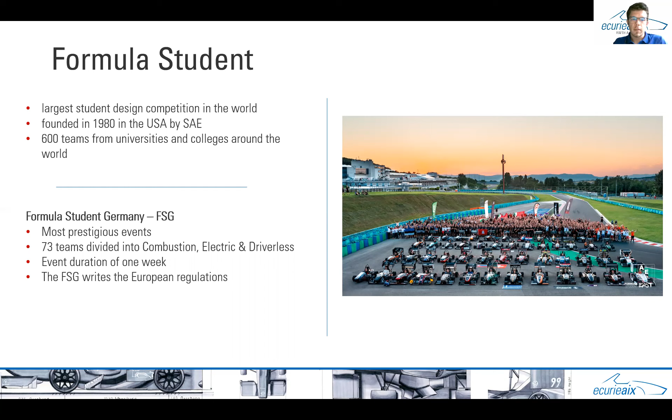To get a short overview of what I'm talking about, in the beginning I want to introduce you to our team. Then I give you an overview about our last season and the success we got. And then I want to talk about the Altair software we use. And in the end, I will give you an overview about the highlights in our current cars which are related to the use of the Altair software, especially the chassis or topology optimization and the structural aerodynamics simulation.

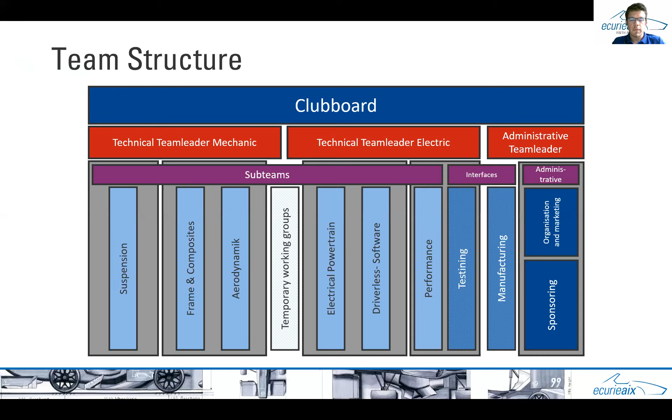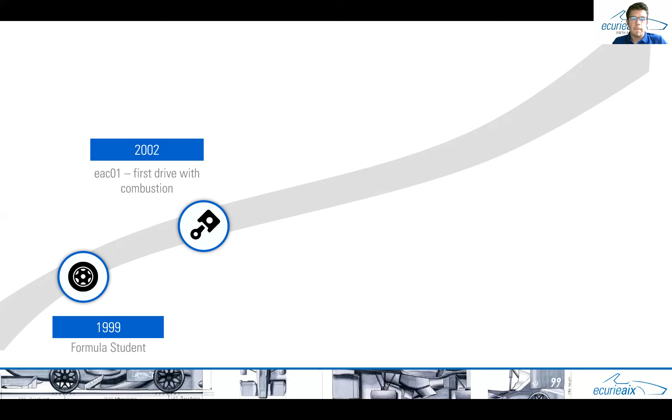As I said, we were founded in 1999, and in 2002 we had our first drive with our first combustion car, the EAC01. Then in 2010 we built our first electrically powered car and ran the two classes in parallel until 2013, when we built our last combustion car. And in 2017, we added the driverless software and sensors, cameras, all you need for a driverless car onto our 7th electric car to start competing in the driverless class.

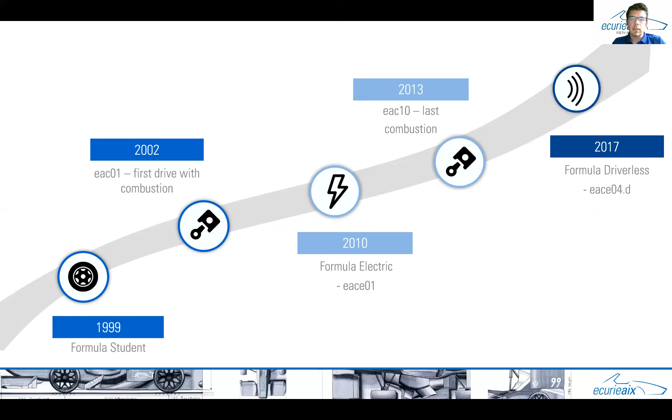Here are the results from the summer from the EV car. It was a really successful one for our team because we won a competition overall for the first time in club history, the Formula Student Austria. And we were always close to the podium at almost all the others as well. We had great success also with the driverless car. We were able to achieve 3rd place overall in Hungary, at Formula Student East.

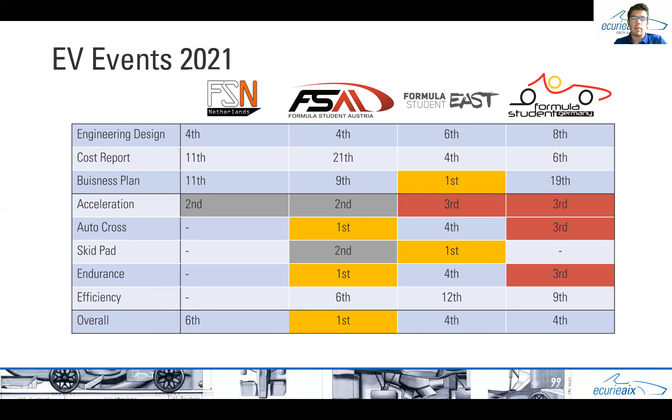So we do not achieve the low weight only because of the choice of material, but also with new geometries, lighter geometries, optimized geometries. But there I have an example later. The software we use is, on the one hand, EsaComp, which I will explain later.

Mostly we use HyperMesh with the solver OptiStruct, with which we do all structural simulation. But also Altair Inspire is very exciting for us because we can rebuild our topology optimization with it very well. In the following slides, I would like to give you an overview and more detailed impressions of what we do with the software, what we have achieved with it and how our workflow looks.

Here, let's start with EsaComp. When we start to design a monocoque, we do the preliminary design with EsaComp. We simulate there a 3-point bending test because it's prescribed by the regulations we got from the FSG. For some years now, we've been using a sandwich structure in the monocoque, which means that there is a carbon outer layer, a core material, and an inner carbon layer. And that gives a lot of structure and, at the same time, a lightweight design.

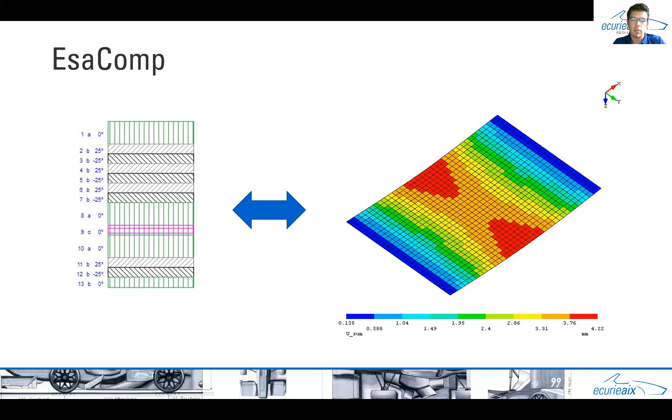And so in EsaComp, we can iteratively change the layers or the core materials, for example, aluminum honeycomb, or the angle of the layers we want to lay in the panel. So we can click them together fast and simulate them also very fast. And then in the end, we can incorporate these results into the monocoque simulation, which you can see on this slide. Here you can see our current monocoque in HyperMesh.

After constructing it finally, we removed all detailed parts which are too complex, which simplified the meshing very well. Then we declared some different zones in HyperMesh so that we can improve them locally more easily, because then we can assign a whole ply to the whole zone more quickly. In addition, we simulate the whole monocoque with a ply-based simulation instead of a zone-based simulation. That gives our constructor more freedom in HyperMesh to play around with some plies.

Also, the main hoop and the front hoop are integrated into the simulation. They are simulated with 1D beam elements, with the corresponding material values from the steel we use for those two parts. We integrate them because they are main parts of the monocoque, and they stabilize it quite a lot.

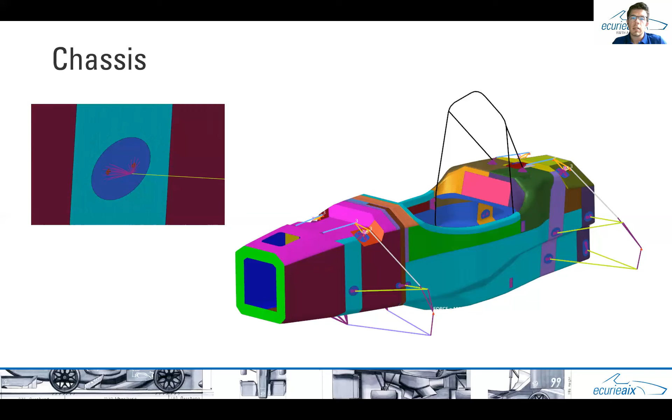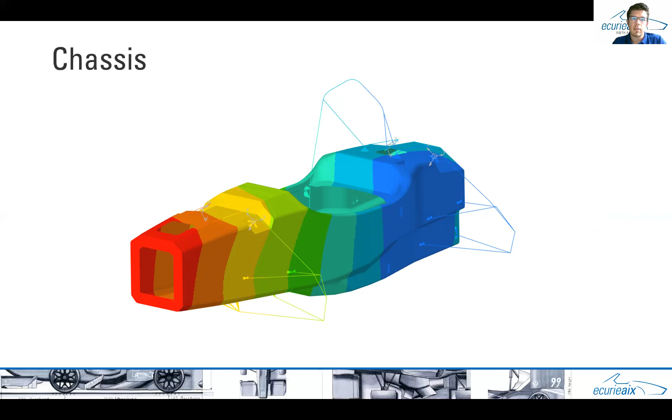Another example of a part in the car which we designed with HyperMesh is the steering cage. It's right behind the dashboard and houses our steering. Here we were able to save a lot of weight due to the fact that we used topology optimization. Afterwards we printed the result out of aluminum.

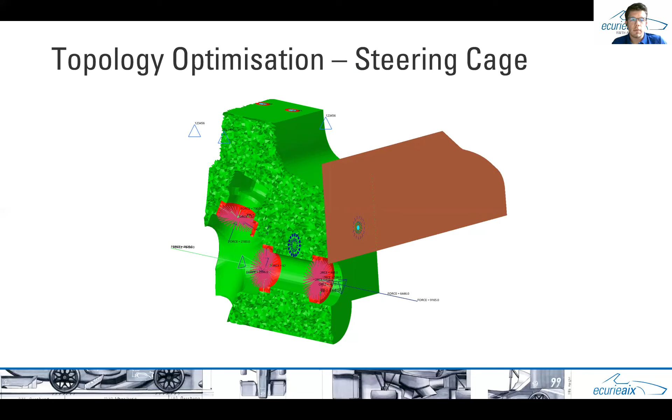Here on the slide, you can see the installation space we gave the program and the corresponding bearings with their forces, the forces which the simulation should take into account. We determined these forces beforehand so that we got realistic simulations for our steering cage. And after some simulations, we got this result.

It's always exciting to see those results from topology optimization, because you can learn a lot about the load paths from these different forces, and also for different materials when you tried it out. It looks a little bit different every time.

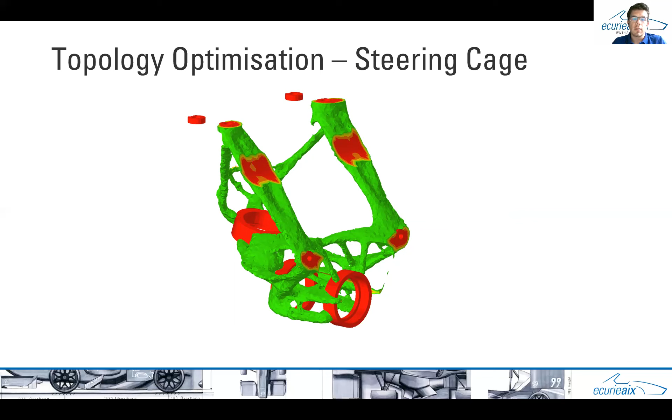So this was our result for the steering cage, and here you can see where we began to reconstruct our result from the simulation. We did this in Altair Inspire and tried to do it as closely as possible to the simulation result. It took a lot of time, but the result was quite nice.

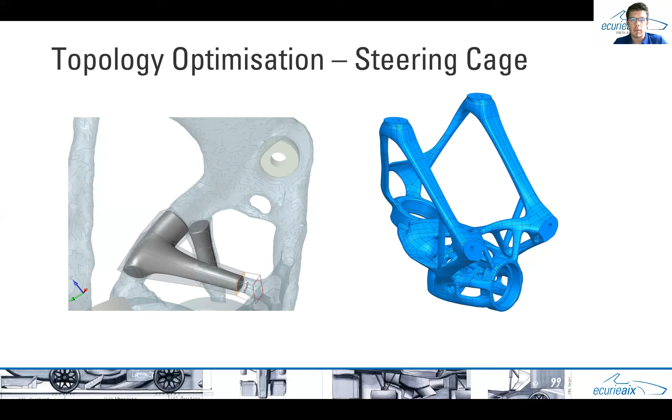After we constructed it, we went back to HyperMesh and simulated the constructed part with the assumed forces and the same connections as the topology optimization, so that we get an idea of how the construction works, and maybe we can save some material somewhere to save some more weight.

So it was an iterative loop of simulating, interpreting the results, removing some material and simulating again until we had a final result where we could save 30% of weight compared to our old concept, which was a welded aluminum cage behind the dashboard. So quite a lot when we think about this small part.

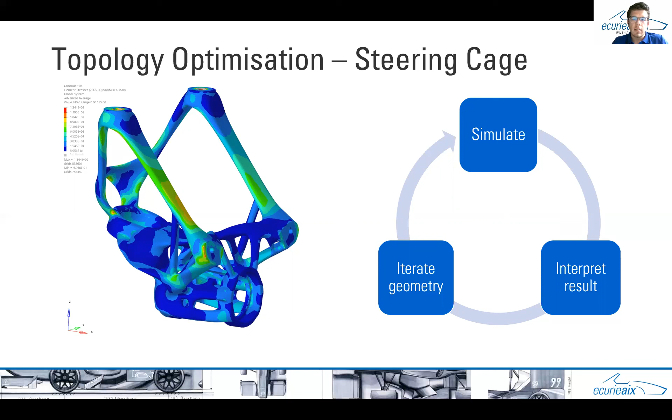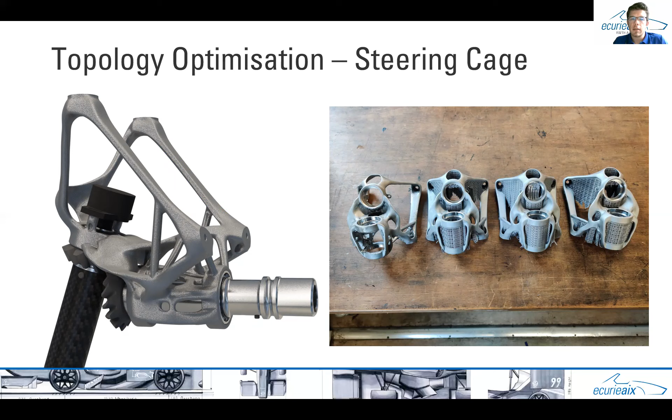Then I have another assembly group which was designed with HyperMesh, the aerodynamics. We simulate all structural things for the aerodynamics in HyperMesh. After we retrieve the geometries from the aerodynamics group, we can simulate the layup and the inner structure for those parts. We calculate on the one hand with the aerodynamic load, and on the other hand with the loads from the regulations. For example, every aerodynamic part is allowed only to displace 10 millimeters while 200 Newton act on a surface of 225 square centimeters.

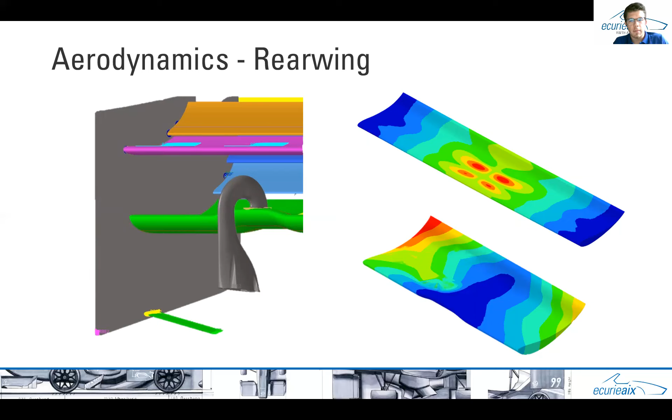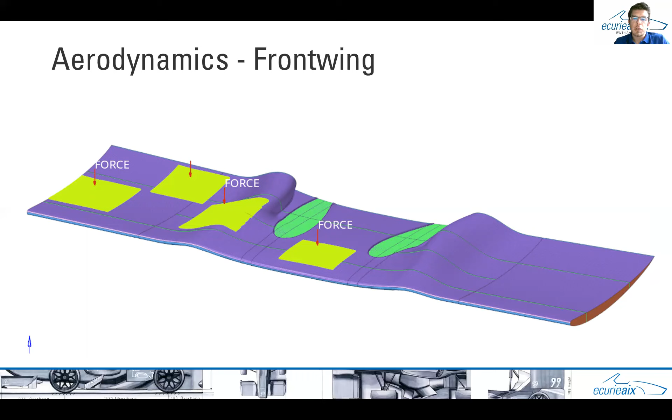In the next slide you can see the result from the simulation. It's the result from the force acting most outward, so it had the most displacement, obviously, because of the largest lever arm. After every simulation, we can see if it makes sense to add some more layers of carbon, maybe some UD stripes to support the structure, or some different inner structures. In this way, we did many simulations for every part to get the best layup for our structures.

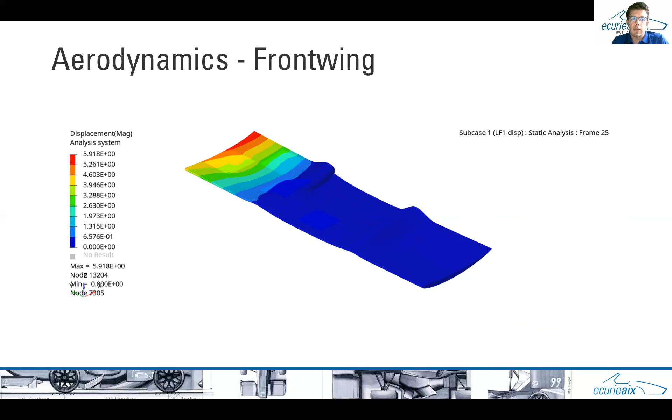But for us, not only the displacement is interesting, but also the composite failure of the layup, because when they have too much stress, they fail, and that would not be good, of course. That's also something we have to take into account, that all our fibers are still working under the loads we have in our races.

Here's also the example of the front wing main element on the top and on the bottom side. There are different places where the composite failure is bigger, and where you could think about adding some more plies to have a bigger safety factor.

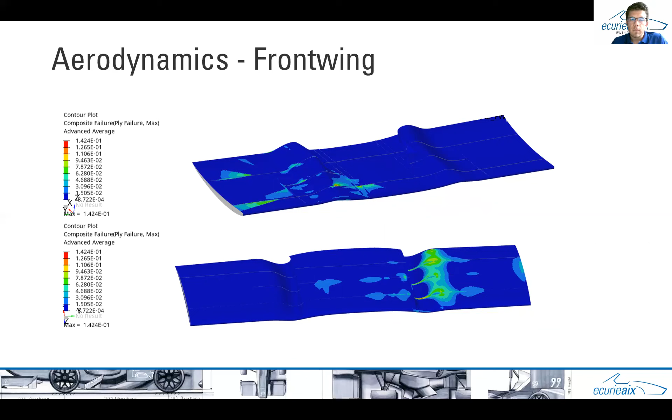So this was my presentation about the work with the Altair software in our Formula Student team. I hope you got a good insight into our work and enjoyed my presentation.